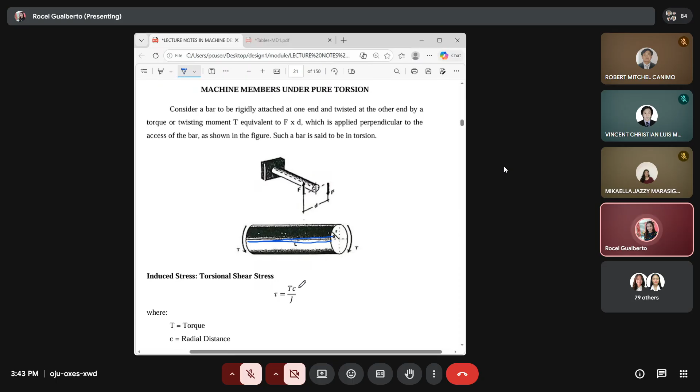So we call the corresponding induced stress on the shaft as the torsional shear stress. That's the stress on the shaft, which we call torsional shear stress. And how do we design the shaft considering this stress?

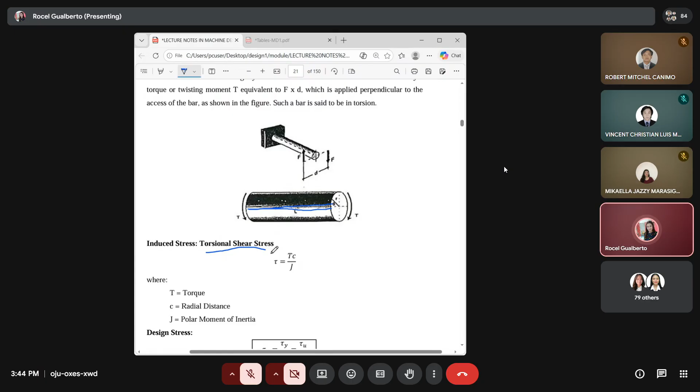This is similar to what we did with tension. For tension, to design it, we have what we call designing based on strength failure versus deformation failure. It's the same here. Based on strength failure, what we do is we simply evaluate the shear stress - this is the induced stress on the shaft, which we call the torsional shear stress. The general equation uses the symbol tau: tau equals TC over J. This is the general equation for torsional shear stress.

T pertains to the torque, C is any radial distance, and J is called the polar moment of inertia. Which one do we call C, the radial distance? Coming from the center, any distance from the center is called a radial distance. For example, if this is our cross-section, you have the center, and any distance from the center - say up to that point - you call that radial distance C. Now if we want to get C maximum, which one would that be? It would be the radius.

So any distance from the center is C, and what we take is the highest value - the maximum radial distance. Why do we use the maximum radial distance? It's because at the farthest fiber, that's where the maximum torsional shear stress is located. So we want the maximum stress, and that can be seen if the value of C is also maximum. That's why we consider C to be the radius, because that's where tau maximum occurs.

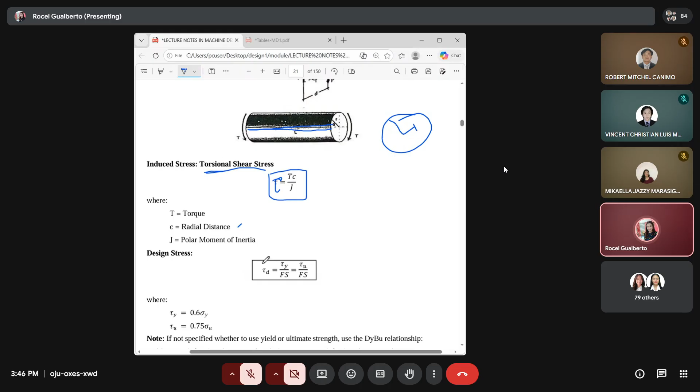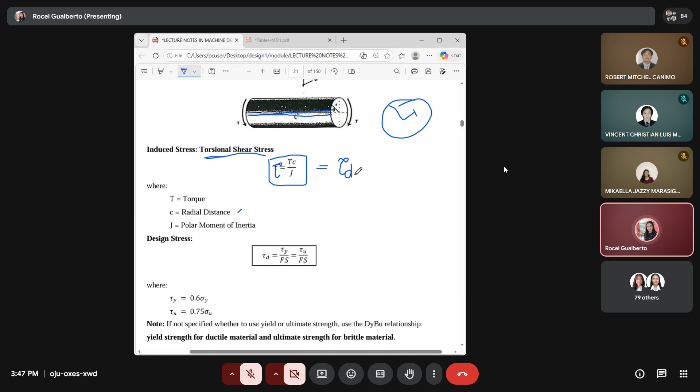So how do we design it? When we design it, this tau value is to be equated to your tau D - equate it to the design stress. As we said, for a good design, you have to equate the design stress to the induced stress of the material. So your tau D is equal to your torsional shear stress, TC over J. Now how do you obtain the value of tau D? The same way we used before with sigma: sigma D equals sigma U over Fs, equals sigma Y over factor of safety. So if that's tau D, the equation is the same - the only difference is this should be tau Y over factor of safety, or tau U over Fs.

Hindi po pwedeng magkahalo na gagawin mo to sigma Y, sigma U. Hindi po. Kung ang design stress natin is in a form of a shear, dapat yung tau Y, tau U ay parehas din. So, yun po dapat ang gagamitin natin na equation.

Now, for the design stress, alin po sa dalawa ang gagamitin? Ito po bang nauna na yon, tau Y over Fs or tau U over Fs? So, alin sa dalawa?

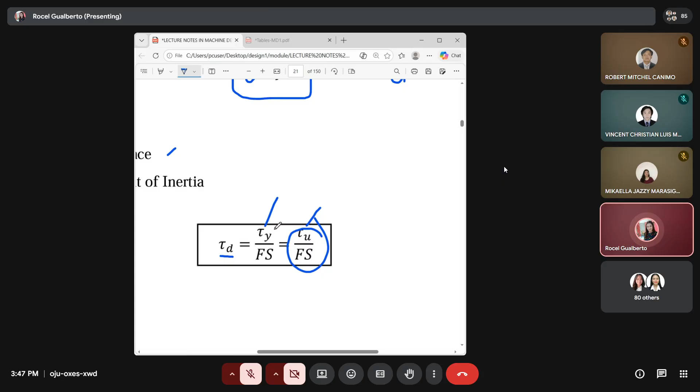Again, base po yan sa basis ng design. Pag sinabi po base design on the ultimate, ito po yung ating gagamitin. Pag sinabi naman base design on the yield, then you have to make use of this equation. Your tau D would be tau Y over Fs.

Pag wala pong binanggit, you again refer to the type of material as the basis of design. Kapag ductile, it should be based on the yield. Kapag brittle, it should be based on the ultimate. Maliwanag po ba yun?

Ano lang po yung pinagkaiba niya? Ang pinagkaiba niya lang is the use of tau Y and tau U. Tau Y and tau U, these are not seen on our tables. Sa design tables po natin, given the material, sigma U and sigma Y po yung kinukuha natin doon sa mga tables.

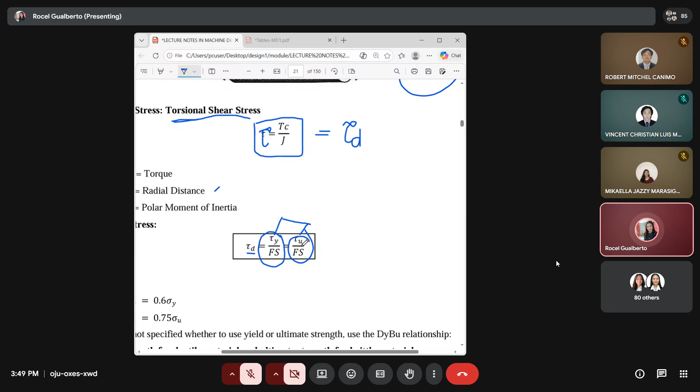So, ngayon, ang need po natin is tau Y and tau U. So, you have to solve for the values of tau Y and tau U. How do you obtain the values of tau Y and tau U? You make use of these relations.

Yung tau Y po natin ay makukuha galing sa sigma Y. So, galing sa sigma Y, you solve for tau Y. Tau Y is 0.6 of sigma Y. And your tau U is equal to 0.75 of sigma U. Ito po yung ating magiging value.

Dun po sa solution natin, dun sa material specification, yun pa rin po ang makikita: sigma U and sigma Y pa din po. Pero kung gagamitin po natin yung tau Y, tau U, sa solution na lang po natin yun makikita. Hindi po siya kasama dun sa material specification. Maliwanag na po yun.

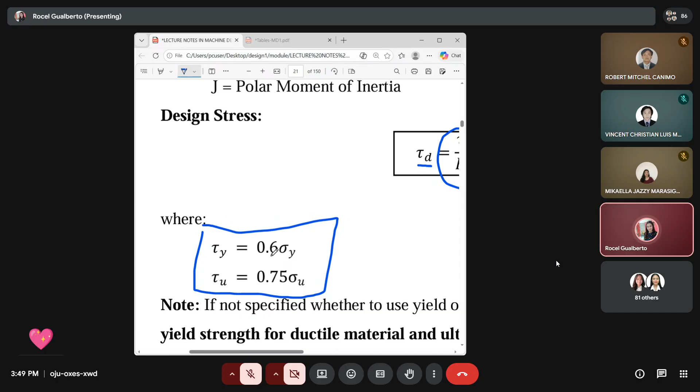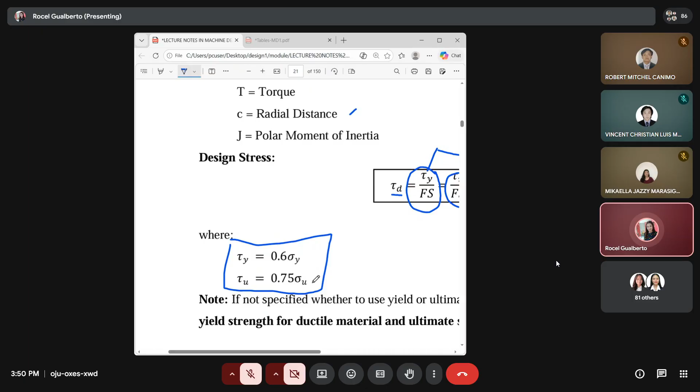So, 0.6 of sigma Y, tatandaan po. And tau U is 0.75 of sigma U. So, it all, ano pa rin po, dependent on the value of sigma Y and sigma U values. Yan po yung gagamitin natin dito.

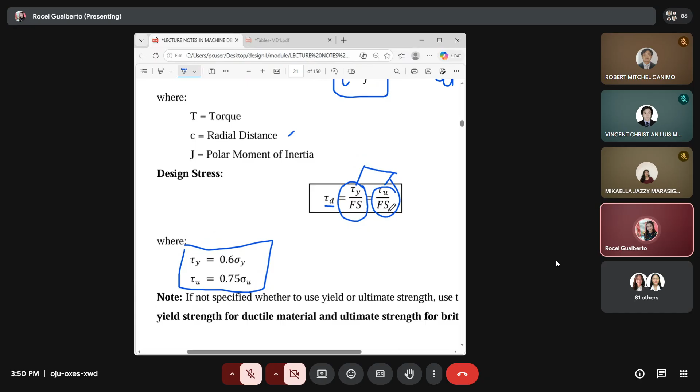For the factor of safety naman po, the same lang po, coming from table 1.1. Dependent on the kind of load, the type of material, and the basis of design. Yun po yung para sa side nandito sa tau D. We go po dito sa ating induced stress.

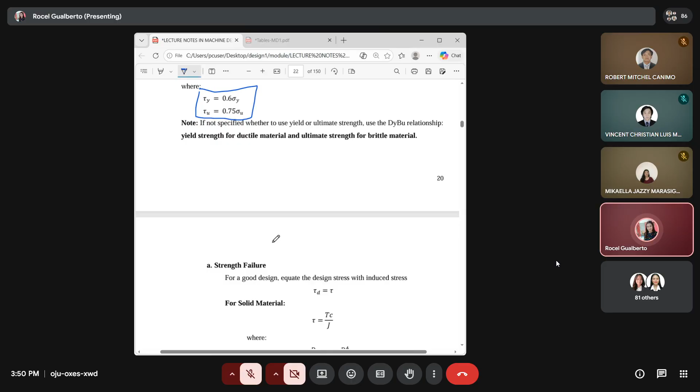Sorry, I do not have my pen tablet now. So, I am using simply ito po nandito. Let us have first po yung parte ng induced stress natin. I-recall lang natin ng kaunti. The general equation, tau equal to TC over J. Yan po yung ating general equation.

And for the shaft po, dalawa yung kinoconsider natin. One is a solid shaft, and then the other one naman po ay yung hollow. Solid tsaka hollow. Kapag po solid yan, again, ang kukunin po natin is the maximum radial distance.

So, what is the maximum radial distance? That would be D diameter divided by 2. Ito yung maximum radial distance natin. Kaya sabi natin here, C is equal to D over 2.

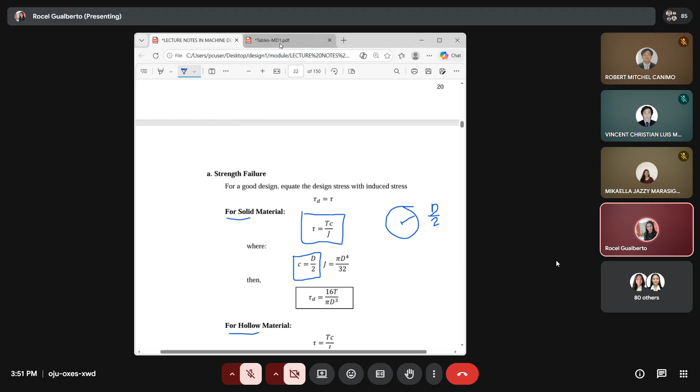Ano naman po yung value ng J for a solid shaft? Saan po natin makikita yung value ng J? This is called the polar moment of inertia. Kung nakalimutan mo po siya, you may refer din po on our table 81. Nakalagay po dyan yung equation ng ating J: pi d to the 4th divided by 32. Ito po yung J niyan.

Kapag po naman hollow, nandito rin po: pi d to the 4th minus d to the 4th over 32. This one is the outside diameter minus the inside diameter. It is included here. Yun po yung J na gagamitin natin dito.

Okay, so ito yung C, this is the maximum value. At ito yung J. So, we obtain the maximum C para magbigay sa atin ng maximum torsional shear stress. Yung makukuha nating value dito ng shear stress, that would be maximum also. So, ang gagawin natin, in place of C here, papalitan natin ng D over 2.

At yung J na yon, papalitan natin ito, J for a solid shaft. So pag pinalit mo to dito, D over 2, at ito naman, pi d to the 4th over 32. Makakancel out mo dyan yung D, D to the 4th with D, and so as yung 2 and 32. Kaya you come up with the final equation, tau is equal to 16t over pi d cubed.

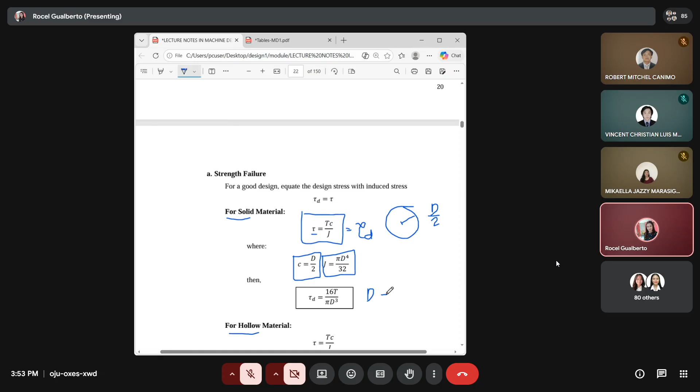And this is to be equated to your tau d, yan yung in-equate natin to the design stress. Kaya ito, tau d is equal to 16t over pi d cubed. Again, t pertains to the torque and d is the diameter of the shaft. So from here, dyan ka ngayon magko-compute ng diameter mo. So you can solve for your diameter.

Dito naman, kapag hollow naman, ganun din ang gagawin natin. Coming from the original equation, TC over J. Kung hollow naman po yan, ganun pa rin ang pagkuha natin ng distance. Coming from the center, kukunin mo yung pinakamalayo. Alin yung pinakamalayo? So it would be the outer radius. Kaya ang outer radius niya is D over 2 pa rin. The big letter D pertains to the outer diameter. So D over 2.

And then J, coming from your table dito. J for hollow, you have this, outside minus inside. So ito po yun. Big letter D pertains to the outside diameter and the small letter D is the inside diameter. So pi quantity D to the 4th minus d to the 4th divided by 32.

So yan po ulit ang ating isa-substitute dito sa C at dun sa J. So pag sinubstitute mo po yung C dito, tapos yung J na yun, ang pwede mo lang pong makancel out dyan is 2 and 32. Hindi po pwedeng makancel out with this kasi this is under an operation. Naka parenthesis po, so hindi po natin pwedeng ma-cancel out. Kaya you come up with tau is equal to 16 TD over pi D to the fourth minus d to the fourth.

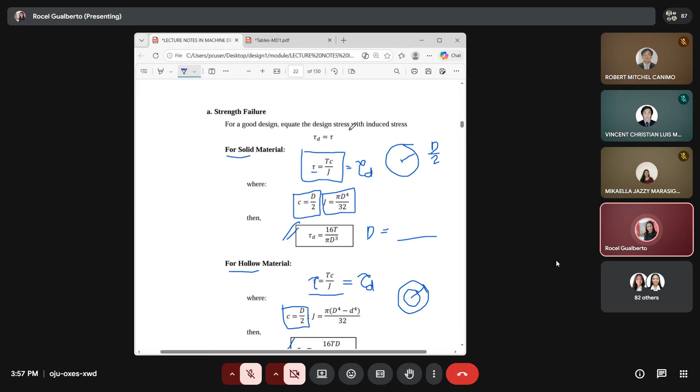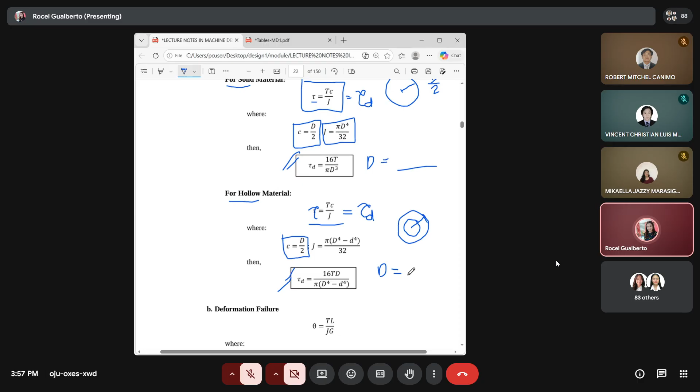So ganun po. So itong method, dito sa una, ito po yung tinatawag natin as the designing based on the strength failure. Base sa strength failure po, may makukuha ka dyang sagot. Kung halimbawa solid shaft po siya, so ito po yung makukuha mong diameter galing sa kanya by equating the design stress to the induced stress of the material. Same thing po, kapag hollow yan, you can obtain po the inside diameter and the outside diameter. So may answer po tayo dyan, galing lang saan? Sa inequate na design stress and induced stress. So ganun po yon.

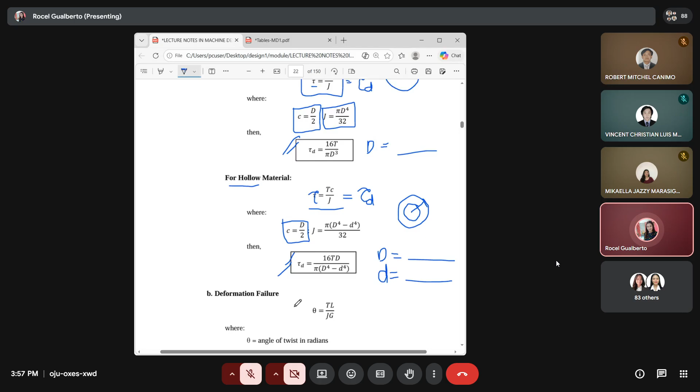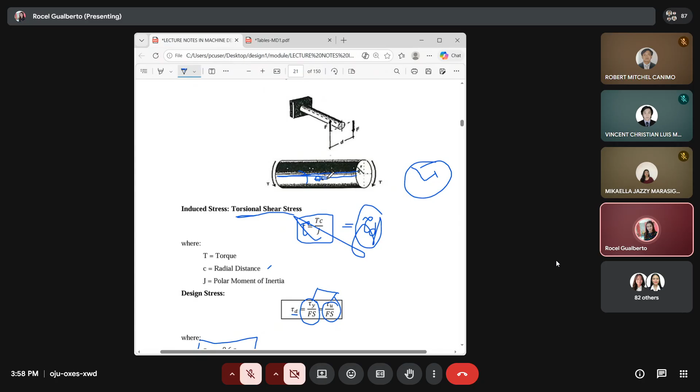The other one naman po is, again, base sa deformation failure. Ano naman po yung deformation if it's a member is under pure torsion? Ang deformation po niya is in a form of an angle, so ang tawag po natin is angular deformation or angle of twist. Katulad po ng sinabi ko kanina, kapag po siya ay ikot na ganyan, yung pong kanyang fiber na yon napipilipit, at titingnan natin, coming from the original na position niya to the final position, ano po yung angle na na-create, yung angle na na-create nung pagka-pilipit po niya.

So yun po yung tinatawag natin as the angle of twist. And we measure this deformation, theta equal to TL over JG. So this is the general equation again. And if you will be using this equation po, yung theta po natin is in a unit po na radians, so it's in a form of radians. So how would you know po na radians yan? Kapag po sinubstitute mo yung torque, you have the unit po nung length, meron kang J, ganon din sa G.

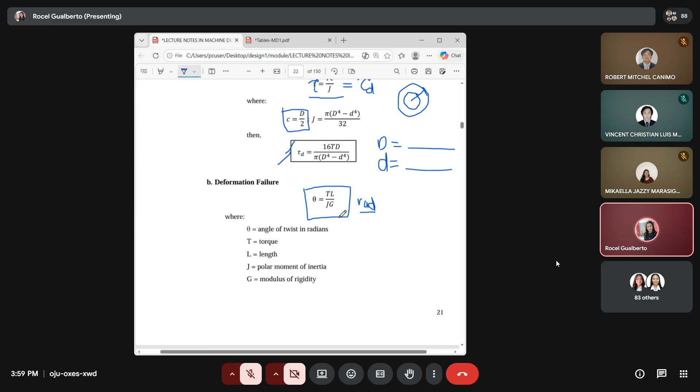So how do you design considering the deformation failure? Just like in tension, what we do is equate this deformation to the allowable limit of deformation. So allowable limit of deformation is equal to theta.

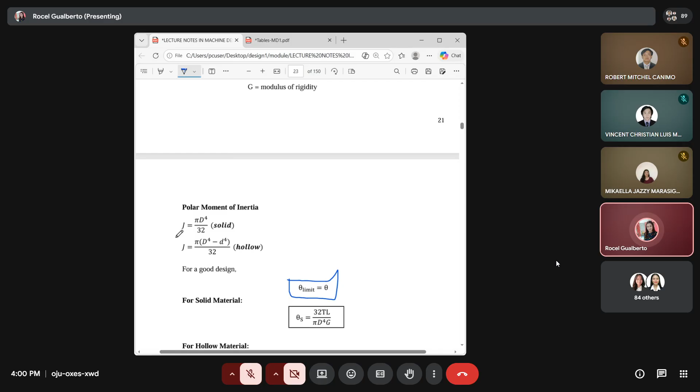Now let's get that theta, using it for a solid and a hollow shaft. The two only differ in J. For a solid shaft, J is pi d to the fourth over 32, and for hollow, you have a different formula. That's what we substitute into the J values.

Again, T pertains to the torque, L pertains to the original length, J is the polar moment of inertia, and G is called the modulus of rigidity. In other books, it's called the shear modulus of elasticity—like modulus of elasticity but with 'shear' in front. So shear modulus of elasticity is the same as G or modulus of rigidity. They're the same thing, and this is a constant for a given type of material.

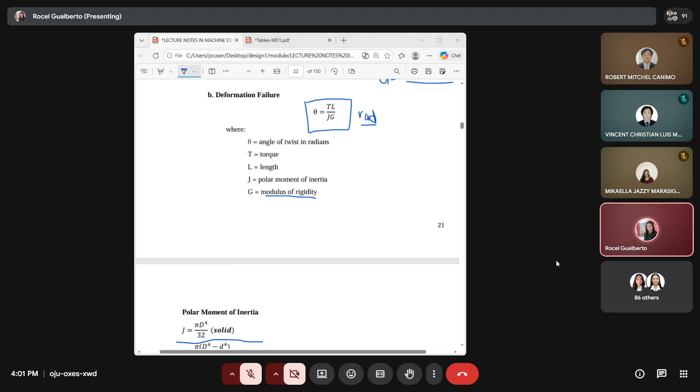So where do we get the value of G? Just like with E, you look first at the particular row given the material, and find the value of G there. If it's not there, it should be in the heading of the table—look for the value of G there. If it's still not there, you assume the standard value. What is the general value for all types of steel?

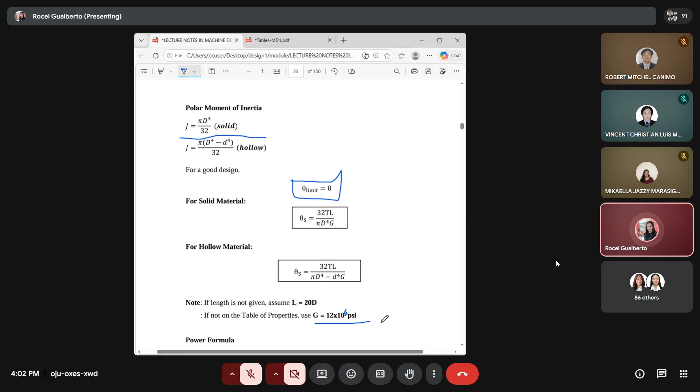You have this value, 12 times 10 to the 6 PSI. In KSI, that would be 12 times 10 to the third KSI. That's what we'll use. This value is only used if you can't find the specific value for the given material in the table of properties. So what do we do?

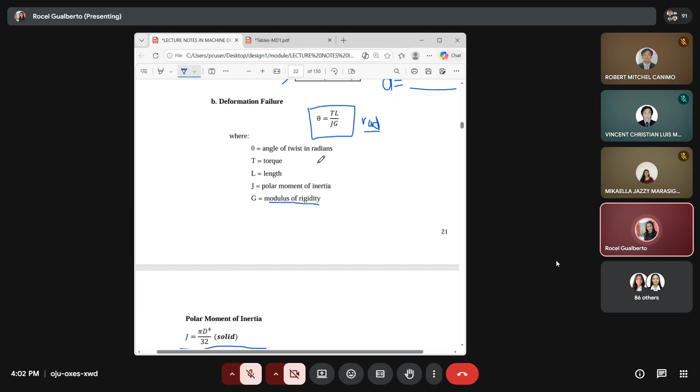From the general equation, TL over JG, we substitute that J. So for a solid shaft, what becomes the final equation? It becomes 32TL over pi d to the fourth G, because pi d to the fourth divided by 32 is J.

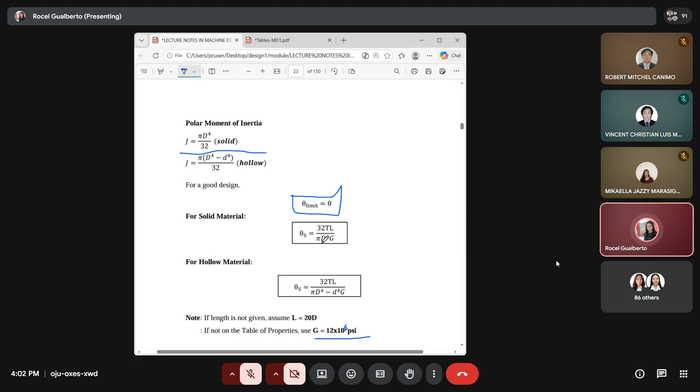And for hollow, this should be subscript H. Theta H is equal to 32TL over pi, with parenthesis, times d to the fourth minus d to the fourth, times G. So that's it—that's the theta.

That's what we equate to theta limit. So to design it, it should be equated to the allowable limit of deformation. What is the allowable limit of deformation? If it says deformation should not exceed 1 degree, that 1 degree would be our stated limit—equate it to theta limit. So deformation failure only occurs if you are given this allowable limit of deformation.

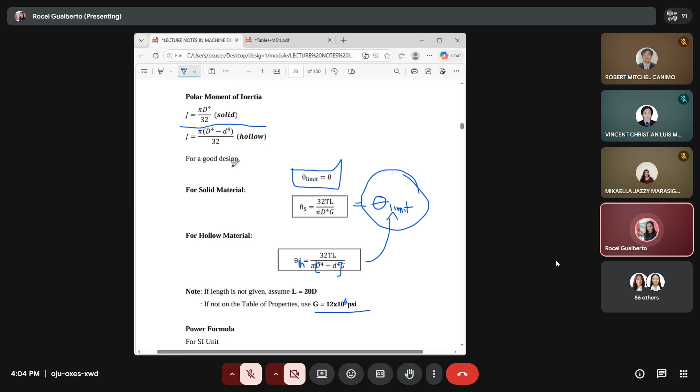So we end up with two answers for the diameter of the shaft: one coming from strength failure, considering the torsional shear stress, and the other from deformation, the angular deformation. Which of the two do you choose? You always choose the larger one—whichever diameter is larger, from deformation or from strength, that's what you consider as your final answer. But if no theta limit is given, your answer is based solely on the strength failure.

Now, another question is: what if no length is given? If no length is given, you can assume to use 20 times the diameter. And again, for the G value, if it's not in our table of properties, assume to use the standard value.

12 times 10 to the 6 PSI. Now, another is the torque. Where can I get the torque, ma'am? The T that we use.

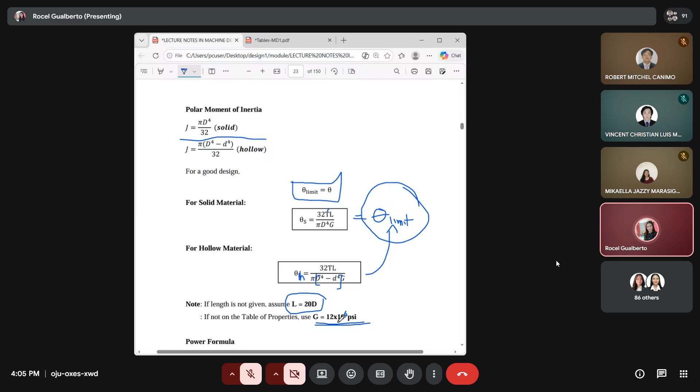The torque will come from the power formula. It comes from the power formula. So usually, when it's a shaft, you are given the power transmitted. And how do you obtain it? So how do you obtain the torque coming from the power?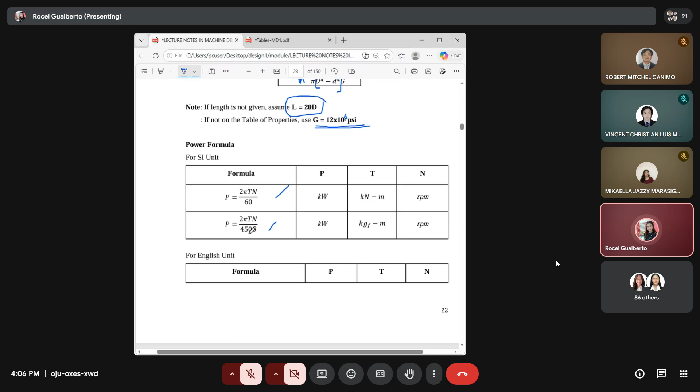So you recall this power formula: 2 pi Tn over 60, and 2 pi Tn over 4,500 if it is in SI units. In English units, you will be using Tn over 63025 and 2 pi Tn over 33,000. How do you use these equations to come up with the torque?

For example, usually we use English units here. From this equation, how do you obtain the torque? So what is our torque? From the power equation, you solve for the torque.

So it would simply be equal to what? The torque would be 63025 times P divided by N. So we just cross multiply. This is 63025 times the power, the power given for the shaft, divided by the value of N.

What we need to do is follow the units given here. So what we substitute for power should be in HP, horsepower. So 63025 times the horsepower rating, and N should be in units of revolutions per minute.

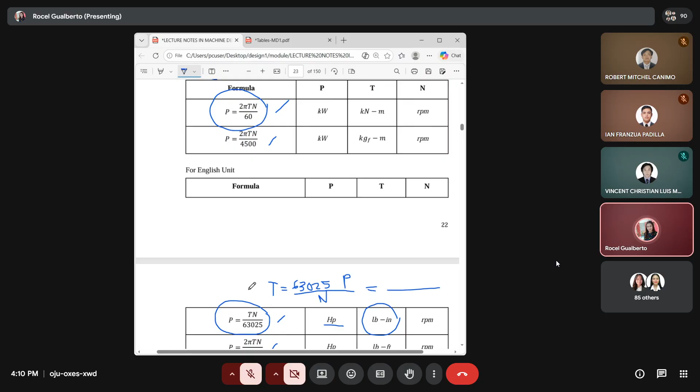So usually, the two power formulas with the circle symbol are the most commonly used. That is how you obtain the value of torque, and that torque is what we use, both for deformation failure and for strength failure.

So again, there will be two answers: one from strength, one from deformation. Whichever is higher, that is to be used. If there's no deformation failure, then the answer is based only on strength failure. Final answers are to be expressed in a standard size.

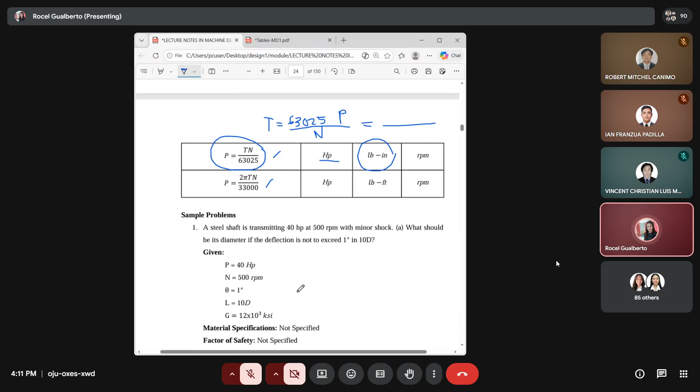So let us see this sample problem. I want you to see this sample problem too. A main power transmitting shaft of AISI 1022 as rolled transmits a torsional moment of 1,500 pound-inch. For a medium shock and reversed loading, what should be its size if the deflection is not to exceed 3 degrees for a length of 12 feet?

So here, the given is the torque. 1,500 pound-inch divided by 1,000, you come up with 1.5 kip-inch. So no need to solve for the torque. But if the given is power, then you need to solve for it using the power formula.

Next, you have deflection not to exceed 3 degrees. That 3 degrees is what we call the allowable limit of deformation. So that's the allowable limit. And as I said earlier, our deformation or deflection should be expressed in radians. Since given is in degrees, 3 degrees, you have to convert that into radians.

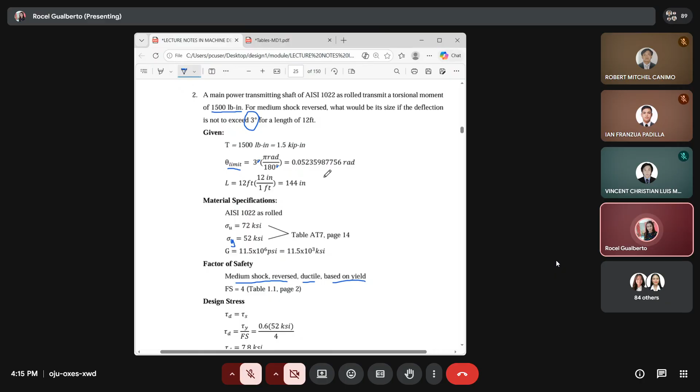Now for the design stress, since this is in torsion, our design stress should be in the form of tau d. And tau d is equal to tau y divided by factor of safety. Why did we use tau y? Because it is based on the yield. So that's tau y over fs.

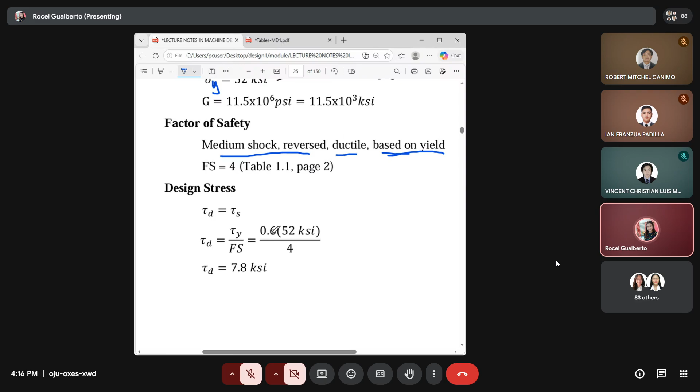So what is tau y? It is simply 0.6 of the sigma y value. So this is equal to your sigma y. So 0.6 of sigma y gives your tau y. So that's what I was saying earlier.

It's not needed in the material specification to put sigma y, tau y and tau u there. Not that. Still, here sigma u and sigma y are what we use. If you use tau y, that's where we'll see it, in the design stress. So 0.6 of sigma y over factor of safety.

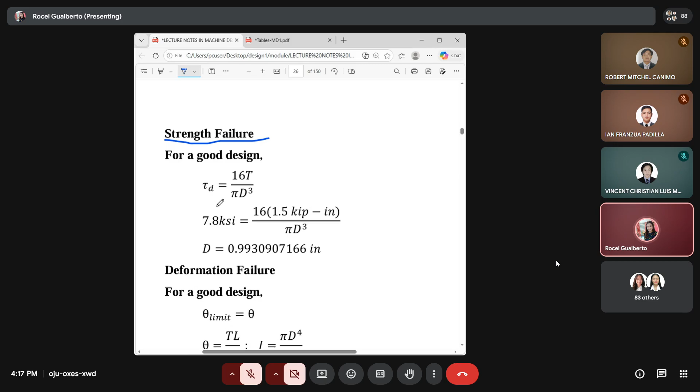This comes from the general equation TC over J. That's what we replaced earlier for solid and for hollow. So we established earlier that for a solid shaft, the induced stress is 16T over pi d cubed.

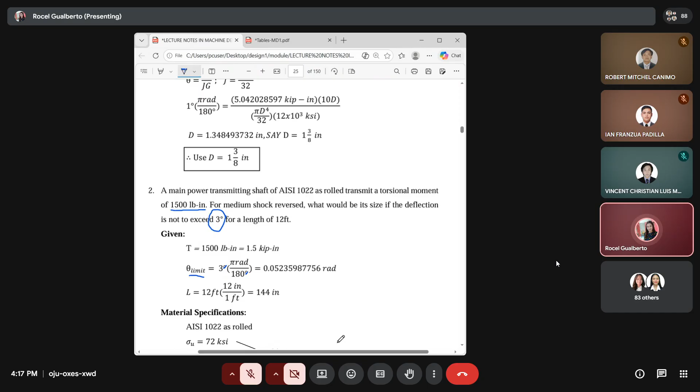So given the T, you substitute 1.5 kip-inch.

Yung tau d is the design stress na solve na natin initially dito. So you can have the value of the diameter in inches.

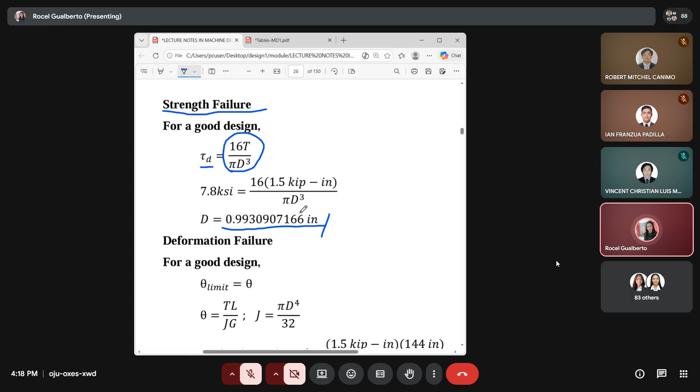Hindi pa lang po ito standard size, and then you have there the deformation failure. Kasi meron pong binigay na allowable limit of deformation. So ito yung clue na merong deformation failure kung may binigay na allowable limit of deformation. And then you equate that to the angular deformation or the angle of twist. So for the angle of twist, ano po yung ating equation?

Considering this J, it would be 32TL over pi d to the fourth G. So yan din po yan. So you substitute those. Yung theta limit lang po, parati po ang gagawin, it should be in radians. Okay, so wag po kakalimutan, so given in degrees, you have to convert that into radians. Equal to, this is the torque, yung length po in inches, 12 feet is equivalent to 144 inches. You have here po yung J, and then this is the value of G, that is the modulus of rigidity.

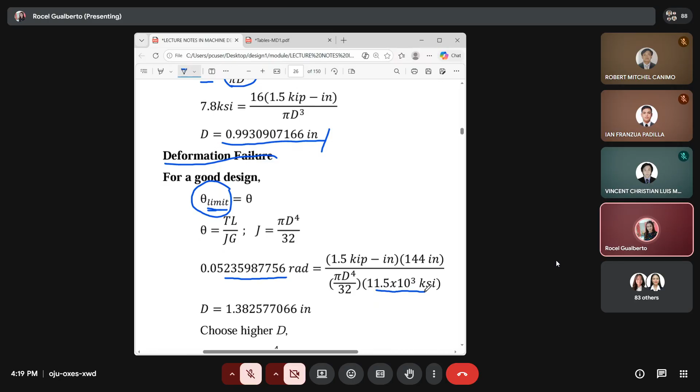Okay, this is the modulus of rigidity, so from there you would have another answer. So this time, you obtain diameter equal to 1.3825 inches. So considering that two, ari po yung sagot sa strength, ari po yung sagot sa deformation. Alin po yung mas malaki sa dalawa, yun po yung magiging final answer natin. So this diameter, 1.383.

So this would be equivalent to 1 4/8 of an inch. Kindly check nga po if hindi siya papasok sa 3/8. Anyone? Anybody? Ano po ang 3/8? 0.375. Tama ba ako? Hello? Kindly check, okay, pag 3/8 is 0.375.

So kulang, kaya ang ginawa niya is 1 and 4/8. At ang gagawin niyo po dyan, kapag kita niyo naman po that this can be a lowest term, so gagawin niyo na po na lowest term. Say you use D is 1 and 1/2 of an inch. So you use 1 and 1/2 of an inch, that would be our final answer po. So it should be 1 and 1/2 of an inch.

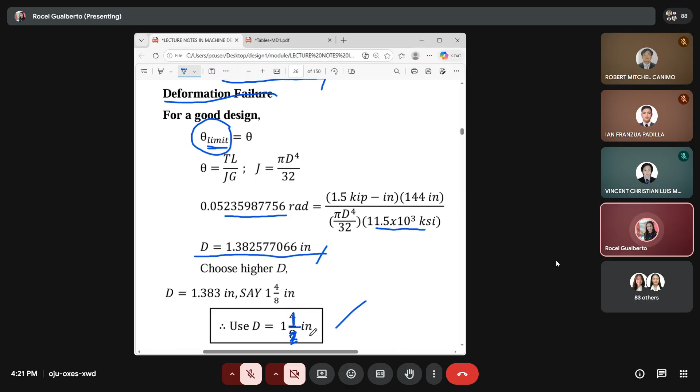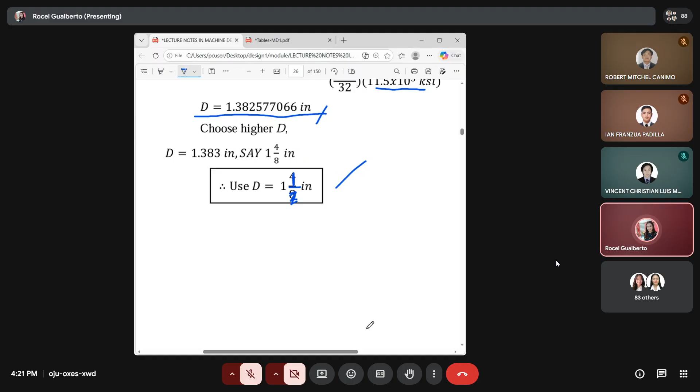So ito po yung gagamitin natin. Saan po siya nanggaling? Coming from the deformation failure. May question po ba doon? Wala po. Wala naman ba? Okay, thank you.

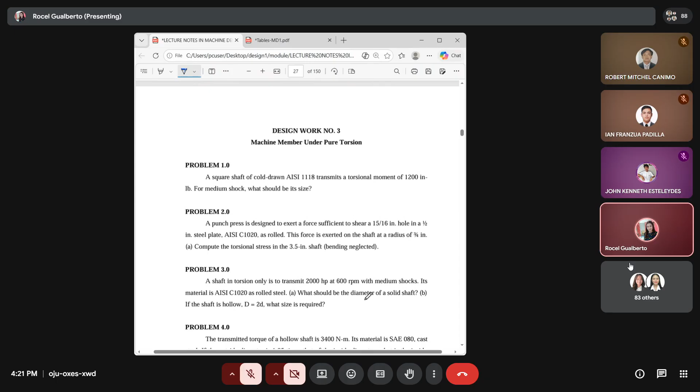Okay, I want you to work on this problem 3. Para may sample naman tayo ng para sa hollow. So hollow, this one, ang gamitin nyo muna is yung letter B, ignore mo muna ring A, itong B lang. A shaft is in torsion only is to transmit 2000 HP at 600 RPM with medium shock. Its material is AISI C1020 as rolled steel. If the shaft is hollow with D equal to 2D, then what size is required?

Okay, so coming from problem 3, wala pong binigay dito na allowable limit of deformation. So ibig sabihin, ang solution natin dito will be based only on the strength failure. Try to solve po yung problem 3 base sa strength failure, yung letter B. Letter B, this is considering a hollow shaft, with outside diameter equals the twice the inside diameter.

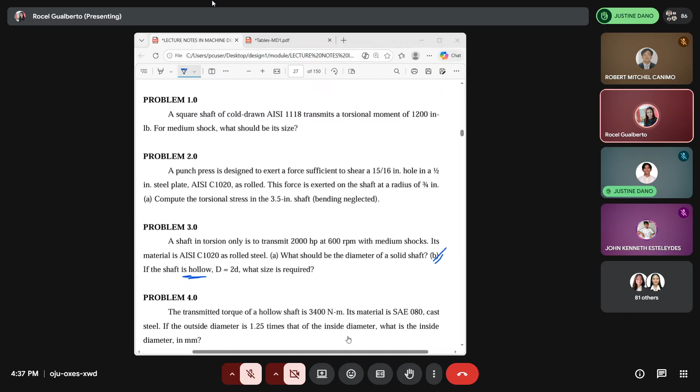Ano po? Okay na po? Okay, so sino pong pwede? Ano na lang po ako. Pa-share screen na lang po, kung sino po ang pwede mag-present. Anyone? Taas po kamay. Number 1 pala. Section 1 or section 5. Kahit po sino. Uy, volunteer po. Okay, so sige, Justin, okay, thank you. Okay, Justin, you may present your work.

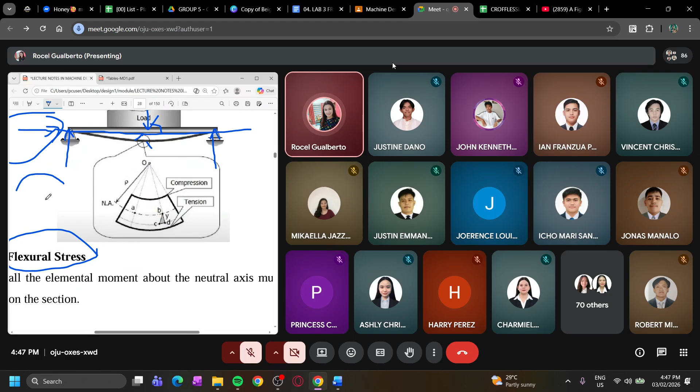That is the reason why we make use of the same symbol, sigma, for bending, because one side is tension and one side is compression. So we add there the subscript F to mean a flexural or a bending stress.

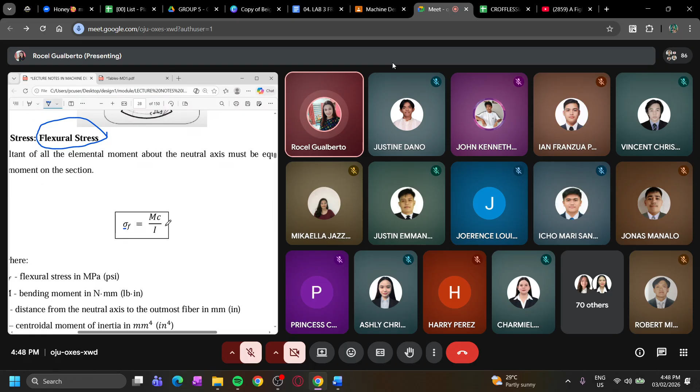The general equation for it is equal to MC over I, wherein M is the maximum bending moment. That's the maximum moment.

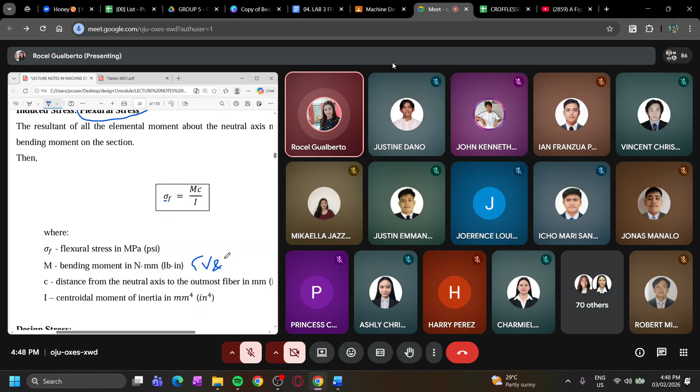And how do you obtain the maximum moment? You use the shear and moment diagram. So we have there V and M diagram. I hope we still remember how to make a shear and moment diagram.

For the shear and moment diagram, there are two methods used: one is the analytical method and the other is the semi-graphical method. I don't know which one was used in your class, so let me know which one you used. But whichever method, analytical or semi-graphical, you will get the same answer.

Our focus is to obtain this M, again the maximum moment, so you will be drawing the diagram. When we say analytical, it entails a lot of equations to arrive at the shear and moment. When we say semi-graphical, it's more on summation of area and summation of forces. So semi-graphical is the shortcut method.

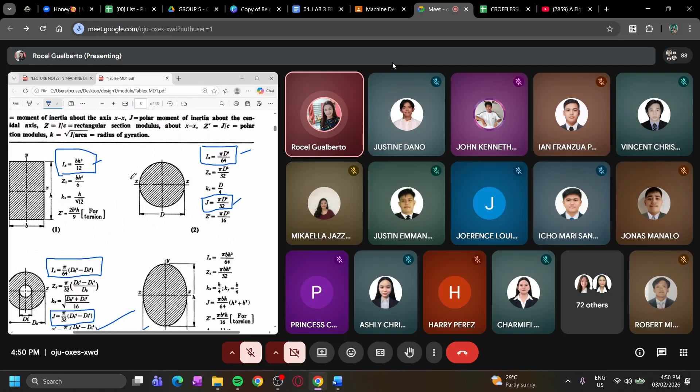That I we can see from Table AT 1, the one with IX there, those are the values of our I. So here in Table AT 1 we can consult the value of I, but limited to these cross-sections only.

What happens if we're given, for example, a C cross-section, which isn't there? So you should also know how to obtain the value of the moment of inertia for other cross-sections, not limited only to the six.

Beam cross-sections are divided into two. The first four are under regular cross-sections, meaning the cross-section of the beam is a regular polygon. You have here the rectangular, circular, and tubular. So these are regular cross-sections.

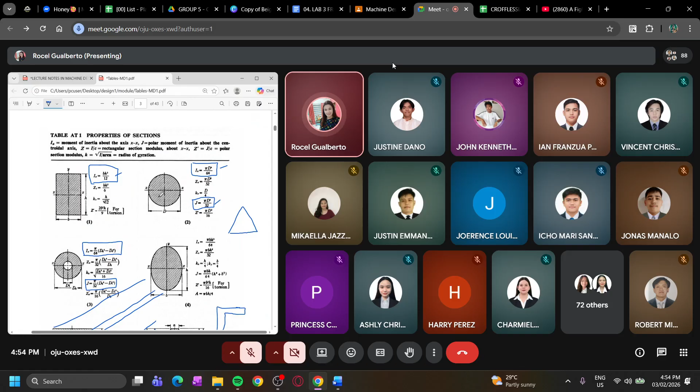Para ma-identify mo on how you will be having this value of C. Kung hindi naman po, then just let me know po kung kailangan ulitin, to repeat or to review kung paano po siya ginagawa, kung paano po malalaman. But for the meantime, you can consult the values of I on table AT 1, limited to these cross sections only. So yun po yung gagamitin natin dito for the value of I.

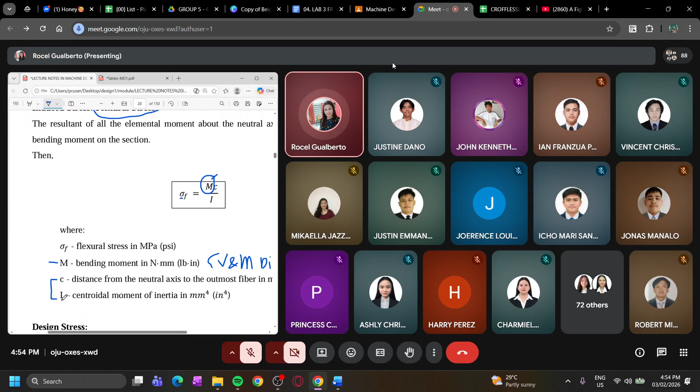Again, yung M natin will come from the beam loading, ano yung mga loads na naka-apply doon sa beam. At yung C and I naman will come from the beam cross-section, ano ba yung itsura ng beam po natin? So magkaiba po ang pinanggagalingan. Ang isa po ay sa load, at ang isa pong dalawa is sa cross-section ng beam, to come up with your flexural stress. Again, this flexural stress, iyan po yung ating induced stress.

So wala pa po tayo dun sa parte ng design. Sa parte ng design, ang induced stress natin is then to be equated to your design stress, sigma D. Lagi naman po ganun. For a good design, equate the design stress to the induced stress of the material. The design stress is just the same, sigma U over Fs, or sigma Y over factor of safety. Kailangan lang alam mo paano hanapin or gawin yung ating induced stress, MC over I.

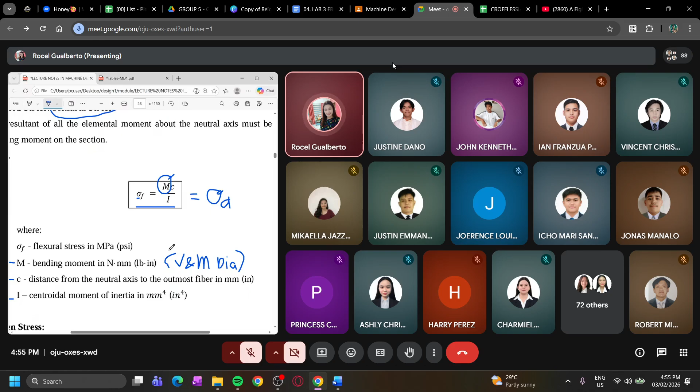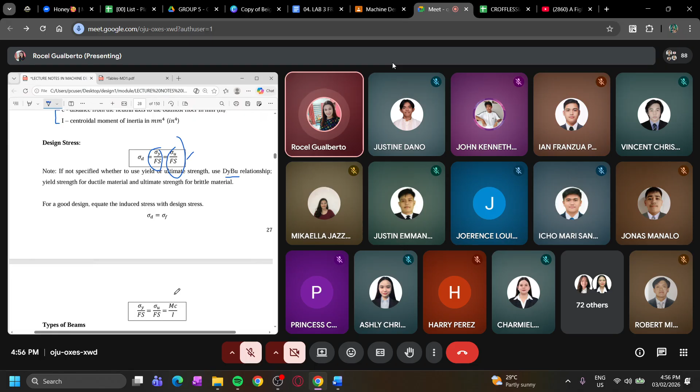So yun po, ito po yung design stress natin. Again, depende po yan sa basis of design. If not specified whether to use yield or ultimate, again, you use the DyBu relationship. And then you need to equate the two, sigma D equal to the flexural stress, equal to MC over I.

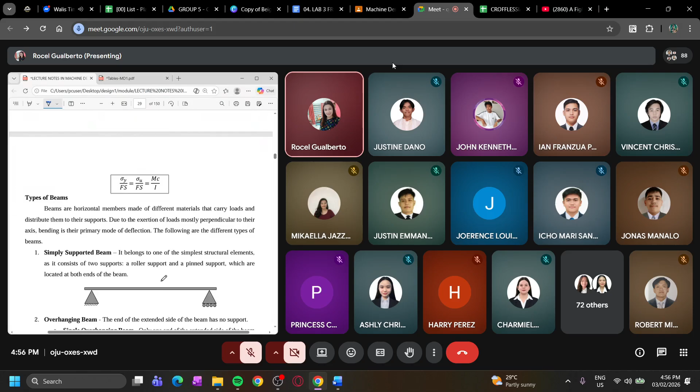Now let us have a quick review on the types of beam. This type of beam, we call this simply supported beam. Simply supported, meaning yung ating pong supports are on both ends. So ito yung supports natin, this represents a hinge, this represents a roller. So nasa magkabilang dulo yung support, so ang tawag, simply supported beam.

Kapag naman ganito, ang isa ay nasa dulo, ang isa ay hindi, ang tawag naman dyan is overhanging. So this one is single overhanging kasi itong isa, yung wala sa dulo. Pero pag parehas wala sa dulo, ang tawag ay double overhanging. So both, kahit iisa or both wala sa magkabilang dulo, ang tawag sa kanya ay overhanging beam.

And then the last one, this is cantilever. Cantilever, ang isa po ay naka-fix, at ang isa naman ay free end. So kumbaga ang support niya ay nandun lang sa isang side, which is naka-fix. So ang tawag naman dyan is a cantilever type.

So dyan po tayo nakafocus dun sa tatlong type ng beam na yan: simply supported, overhanging, and cantilever. So the type of beam that is in relation to the way they are supported. Kung saan nandun yung supports, ang basehan kung ano yung tawag sa kanya. Simply supported or simple beam ang tawag dito, nasa magkabilang dulo. Pag ang isa nawala or both nawala sa dulo, overhanging ang tawag doon. Pag isa ay free end, isa ay fixed end, we call that the cantilever.

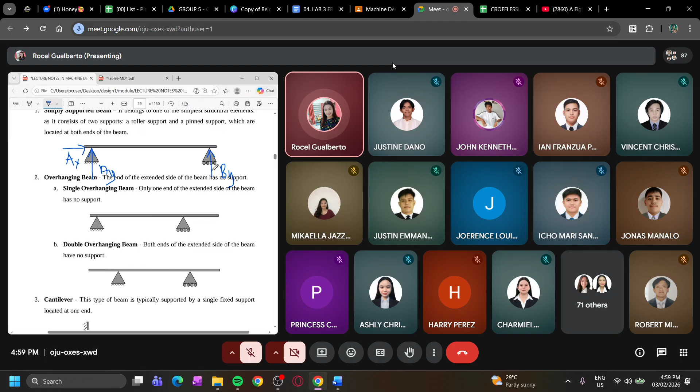When it's a roller, how many reactions? Only one. So you call this your BY. So you can solve for the value of AX, AY, BY, using the equations of equilibrium: summation of forces at Y is equal to 0, summation of forces at X is equal to 0, or summation of moments is equal to 0. So you can obtain these values.

Likewise, for overhanging beams, same thing with the cantilever. That's why they're called statically determinate beams. And then this is what we call the beam loading. So from this, we will get the M, from the equation of flexural stress, MC over I. The M we will take here is the maximum moment. So coming from this, you'll create your shear and moment diagram and obtain the maximum moment.

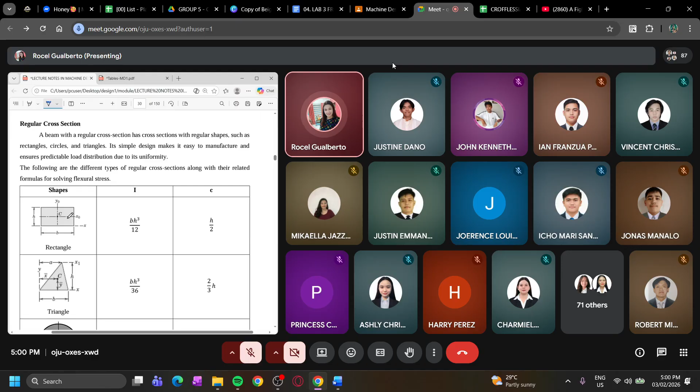And then these are what I call cross-sections, the regular cross-sections: rectangular, triangular, with their value of I and value of C. So from the cross-section, you get the I and C, the M, C over I. So here it is. Triangular, and then you have their circular. These next ones are the economic sections. You have the I cross-section, letter T, letter C, inverted T. So those are what we call the economic sections.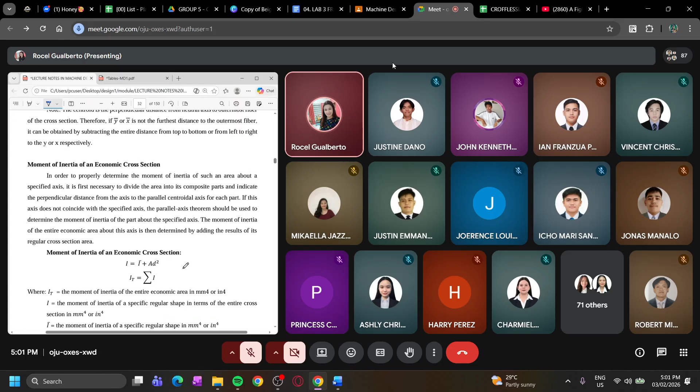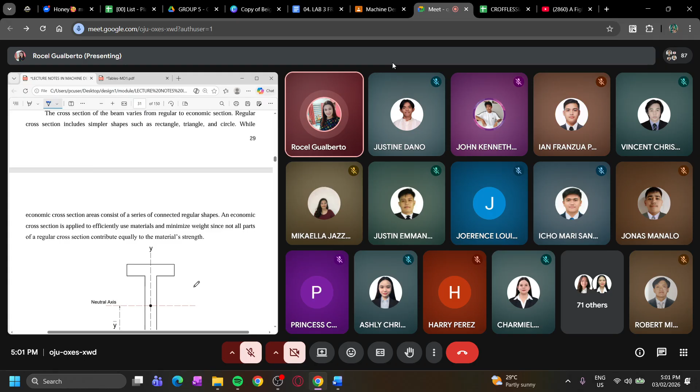So it's 5 o'clock already, sorry. So what you should do is read this first, and then try to review how you obtain the value of the moment of inertia I for economic sections. There's no problem with regular cross-sections since I is already defined here, we already have the equation for I. So our problem is, what if we have an economic section, letter I, letter C, or letter T? How do you obtain the value of its moment of inertia? Please read this first and I'll continue it in our next meeting, for members under pure bending.